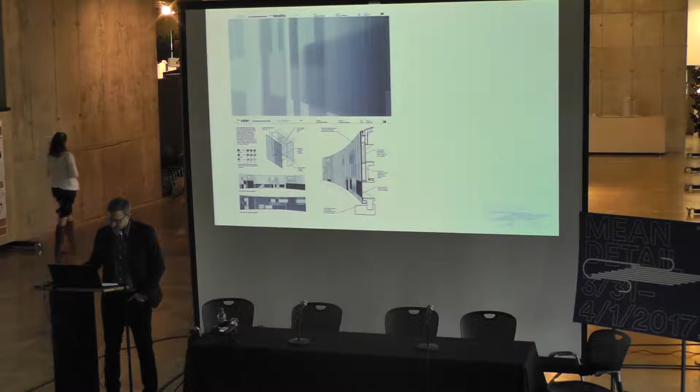Now I'm not claiming this shift is happening just now. We could point to, for example, Farshid Moussavi's book, The Function of Ornament from 2006. And while the book's title advertises ornament, we could just as easily call it an investigation of expressive detail. So this is the format of the book, and we kind of dig into projects individually. Many of you are probably familiar with this book. Let's see, I've lost my place here.

Okay. So I think that Farshid's approach is very sympathetic to the approach of the Symposium. And this is true even down to the way that she situates what I would call a detail, even if it's something like color. She always situates this in relation to an affect. And in the format of this symposium, I think we will frame this as a detail and a consequence. So I think that the limitation of Farshid's book, The Function of Ornament, is that it limits the investigation of consequences of detail to affect. And beyond this, its account of affective qualities produced by each project is limited to a one-word assessment and a very secondary description.

So the goal of this conference, in contrast, is to explore a broader range of consequences through the idea of mean detail. And I'd like to briefly pick apart this term, mean detail, to set up the discussions that will follow. And I'll do this in reverse order. So we'll start with detail. Now I assume that we all already know what an architectural detail is, at least in practical terms. Every architect is intimately familiar with the detail bubble or call-out.

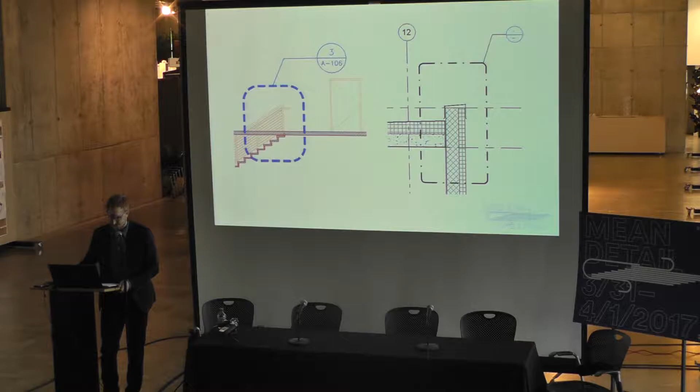And this is clearly ironic, since the notion of a well-detailed building has traditionally been synonymous with craft. Yet a craftsperson, by definition, is someone who should know, through their skill and training, what to do already. So the provision of a detail by an architect implies exactly the opposite.

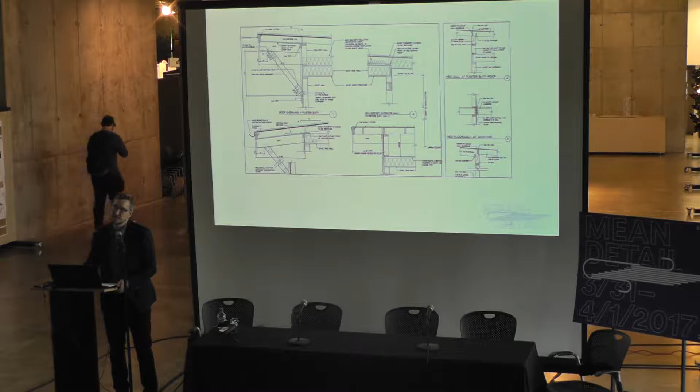And as I researched the topic, I found that the architect and historian Edward Ford, who has painstakingly traced modern methods of construction, makes the same observation in the first volume of his two-part work, The Details of Modern Architecture. In the introduction, he makes the following evocative assertion, which is that detailing was born when craftsmanship died.

He continues that it's always surprising to see how little the drawings of Renaissance architects resemble the finished building. The quality of architectural elements, like column capitals, is largely due to the quality of their execution, and those who did the work had a fair degree of latitude in their adaptation of the design. Without question, the system is dead today.

So in keeping with the arithmetic theme of the conference title, I decided to put a little chart together that might speculate on how many more details we would have to draw depending on the quality of the craftsperson. So on the left-hand side, we have the number of architectural details per 5,000 square feet of building, and this is not particularly scientific.

And as you have a very skilled craftsperson on the left and move towards zero, there's a linear relationship between the amount of details that you have to produce. So I calculated that it would be like a 2-to-1 ratio, rise over run. So for every percentage decrease in skill of the craftsperson, you'd have to actually produce 2 more details.

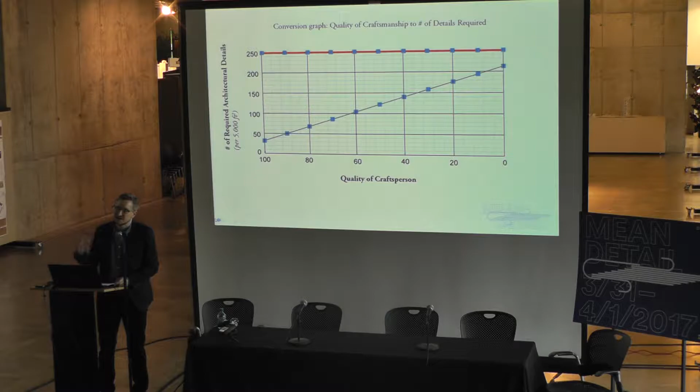And Ford goes so far as to suggest that beyond industrialization, another possible source for the decline in craft is in fact our own obsession with detailing. And he claims basically that 19th century architects were so obsessed with detailing and controlling every aspect of the building process that it crowded out the possibility of craft.

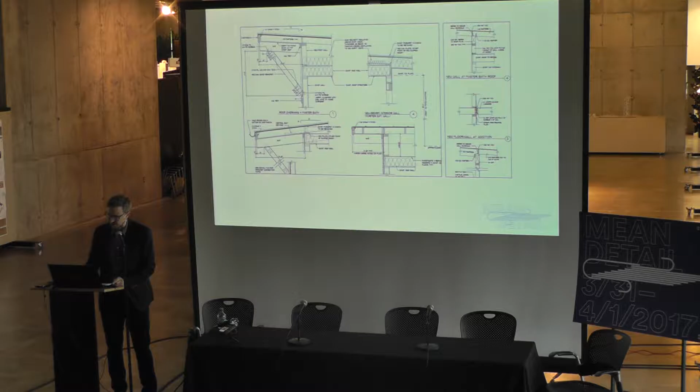So we just love to draw details. These are not particularly beautiful details. This is a detail from one of the participants. I won't name him, but some of you may recognize it. And so we just love to draw intricate details, and perhaps this also results in a decline of craft.

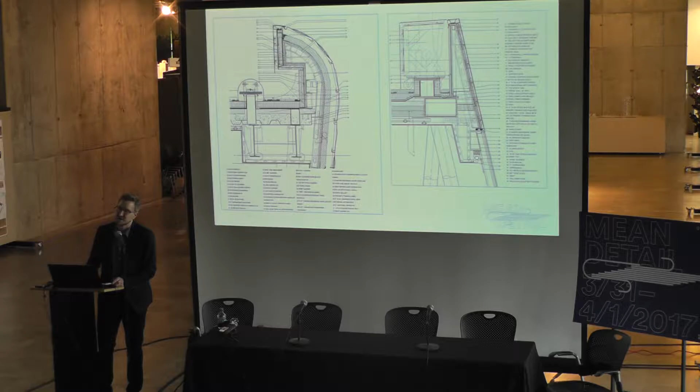And so one more example from Ford that I thought was fantastic. This is a house, Merrist Wood by Richard Norman Shaw from 1876. And in his desire to produce the effect of a somewhat roughly made, half-timbered house, he precisely describes the imprecision that he's looking for in his drawings.

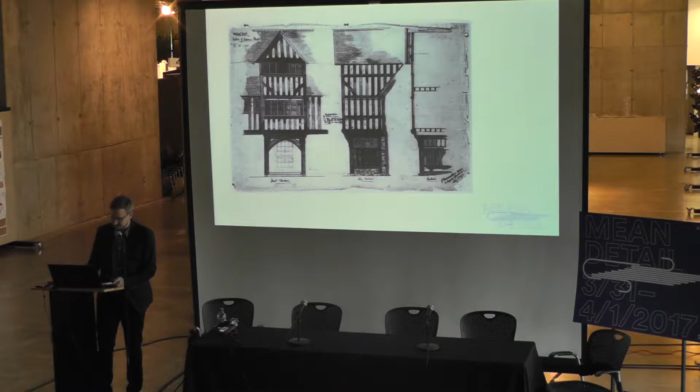So here are the drawings, and if we zoom in here, it's kind of hard to see. But he writes that the space between the timbers is to be varied slightly in width, and the width of the timber board should also be varied. So these are detailed instructions to a craftsperson, instructing him to do his job imprecisely, in a very precise way.

And I think this example, apart from being humorous, clearly shows that architectural detail is not about craft, as it was traditionally conceived. It's ultimately about control. So now, if we say a builder or fabricator has good craft, what we mostly mean is that this person has the diligence to follow our instructions very, very precisely, showing fidelity to our designs, even if we don't know exactly how it's going to get built ourselves.

And I think that this idea of fidelity, diligence, precision, and on the other side, perfection and error, raises questions about how automated fabrication methods and digital design techniques are transforming detail currently. And all of this is simply to say that as we talk about details over the next 2 days, I'd like to focus on the idea that details are not really about craft, but about the production of very specific desired effects and consequences for architecture.

I'm going to skip ahead a bit. And so clearly, clearly I find many ideas and issues

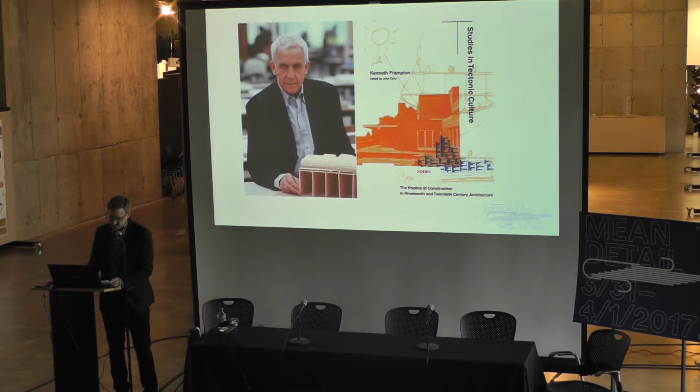Once we wrench the way we feel about detail away from Frampton, and once we chuck out the notion that the detail needs to be a poetic singularity in the form of a construction joint, or the culmination of some sort of idealized, authentic act of craft that restores balance and harmony to the world, my question is, can we embrace a more regular discussion of detail again? And what new worlds open up for investigation? And this is the task of the symposium.

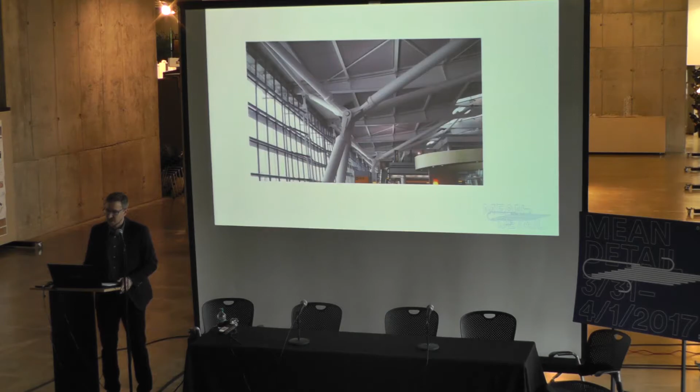So, a quick word about mean. First of all, the idea of a detail as a singularity is not unique to Frampton, and I think a lot of architects, especially high-tech architects who work within the tectonic tradition that Frampton was concerned with, had a much more exuberant take on detail. But just so we're clear on what a detail is as an exuberant, foregrounded singularity, you can take these joints at Terminal 5 by Richard Rogers as a prime example.

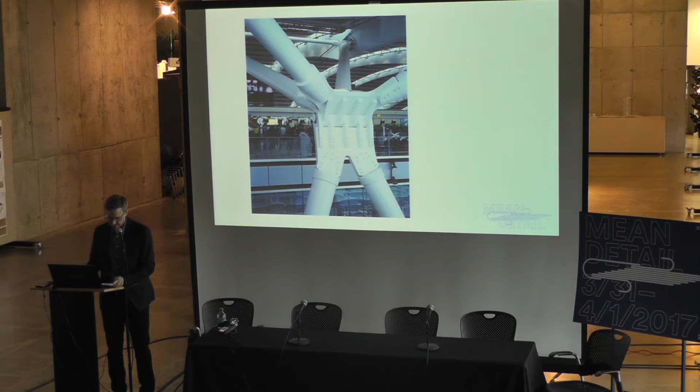So let's move to mean. All right, I've got to work on my comic timing.

And I think that's what we could say that this detail wants to be, from Richard Rogers. This is an exceptional detail. For those of you who have seen the movie Election, this is like the Tracy Flick of details. It is here, foregrounded, raising its hand in class every time an instructor asks a question.

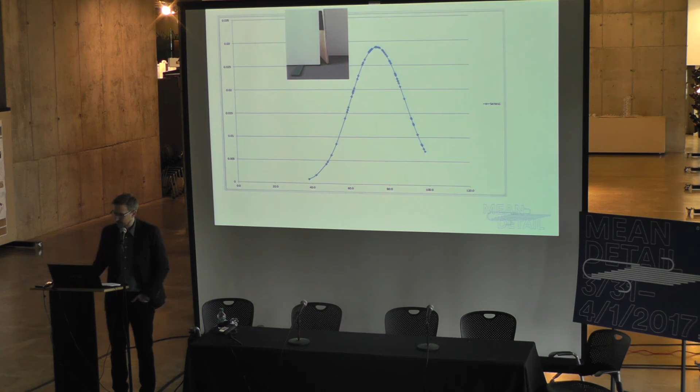And I'll leave you with a slide from one of the participants. I don't know if he or she will talk about this project or not. But when we sort of compare these two details, I think this starts to express the difference between details as they have often traditionally been conceived